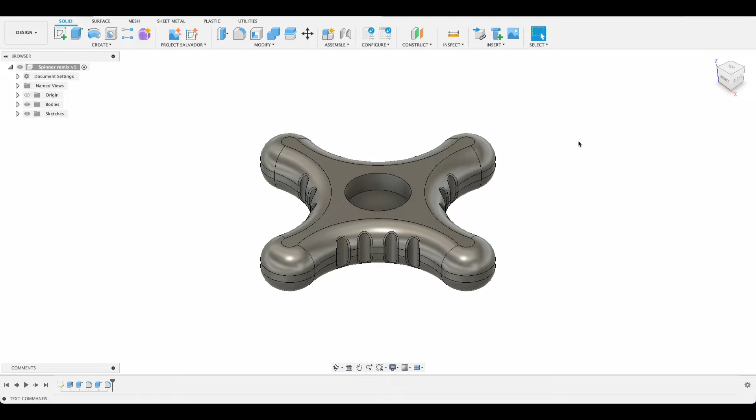Today we're going to be doing this little fidget spinner. So I've got a couple of bearings that we're going to push in there, and we're going to 3D print it. Something new for my channel: I just got a 3D printer, so I want to test it out. So let's get into it.

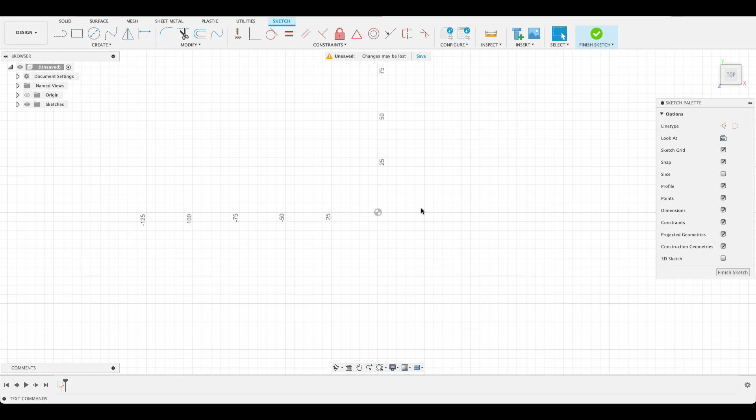We're going to start off with a sketch on the top plane, and I'll push C for center diameter circle, and that will be 16 millimeters. Now I want to have 4 arms around it, and then we're going to extrude it out, putting in a few little features for just some tactile sensation. So let's do some 14 millimeter circles around the side.

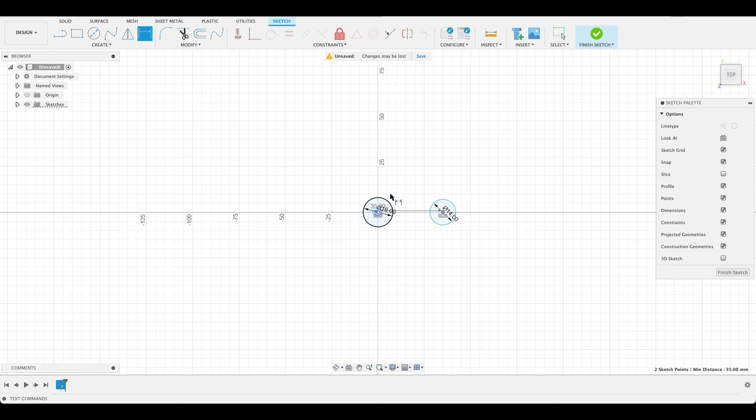I'm just going to put a horizontal constraint on that. So I just went up there, horizontal, vertical, clicked on the center, and clicked on the center at the origin there. I'm going to dimension this 30 millimeters from the center, and then we are going to circular pattern our circle. The center point will be our origin, and there's 4 of them. So you can see it's all fully constrained, which is good.

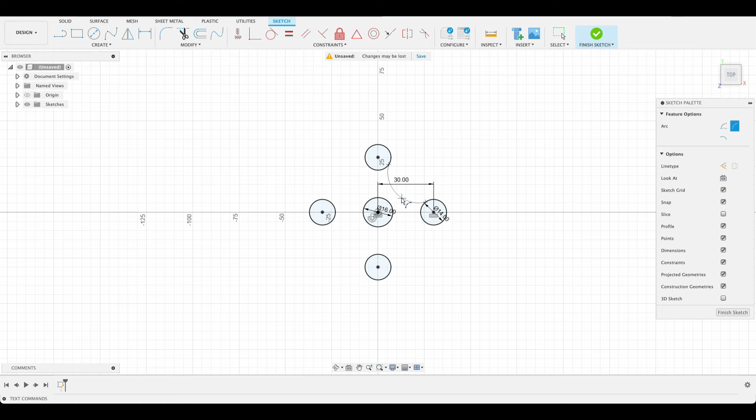Now I want this to kind of curve inward a little bit, so I'm going to create a 3-point arc, and I'll just click over there on the 2 circles and drag it out, and we can take our tangent constraint. So if I put that on there, the arc will adjust so that it runs tangential to the circle. Just gonna move that out a little bit. I don't want it to go too far in. And D for dimension, and I'll just make that 17, and we can see that's constrained.

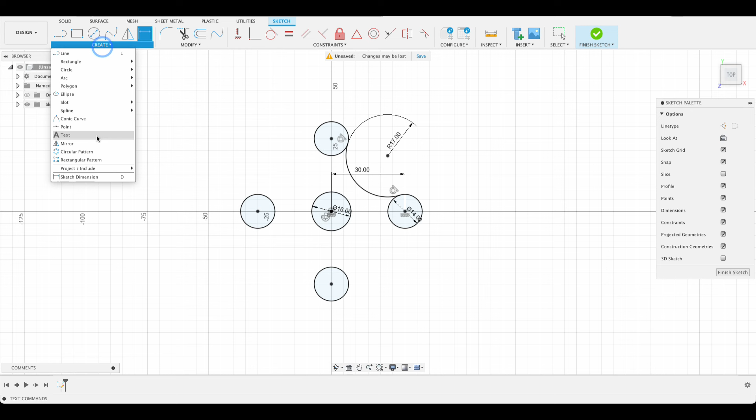Now we'll repeat the circular pattern. The center point, I don't know why I changed the center without selecting. Anyway, we've got our center point and we've got our line, and the quantity is 4. So that's what we're going to extrude up. I'm going to finish this. We'll do another sketch just now, but I want to just extrude this one up.

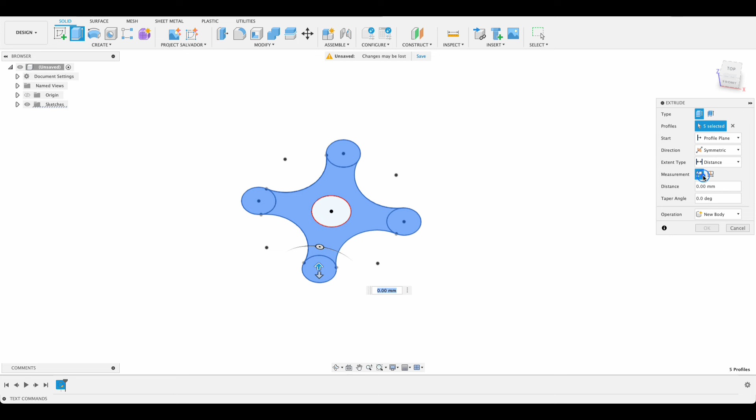So the bearings are 5 millimeters in thickness, and I want this to have like a 2 millimeter gap in between them. So I'm going to do it symmetric around the origin, 6 millimeters, so then there should be 2 millimeters between the bearings, little gap, and then they'll be flush with the top. And I did it symmetric.

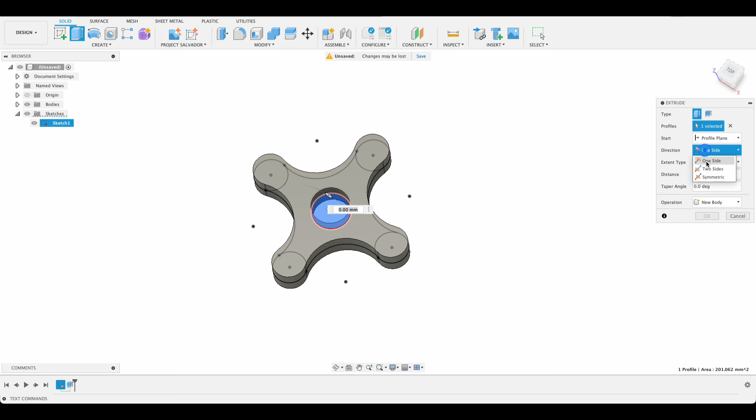You'll see why now. That little center bit is also going to be symmetric, distance 1 millimeter. So now that's joined. If I go into Inspect here and go to Section Analysis, select one of these planes, we can see that we've got that little 2 millimeter section, so the bearings should slot in the top and the bottom and be separated there.

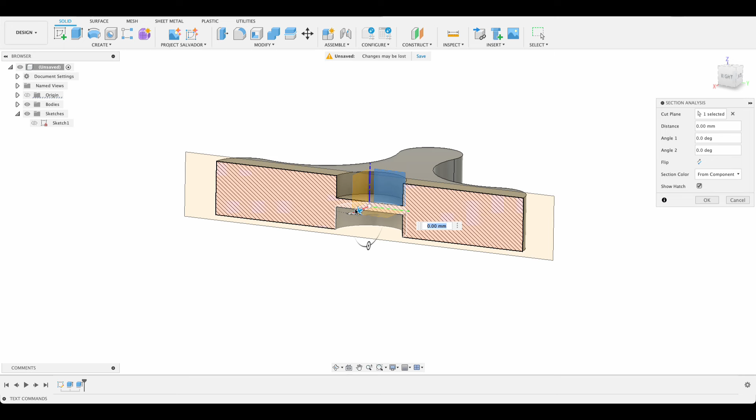So there we go. I'm going to put a fillet around these edges, the entire way around the top and the bottom. Not sure how much. 5. Now it's getting a bit much, so yeah, let's go with 6. Just hope the curved areas don't affect the print. I don't really know much about 3D printing yet.

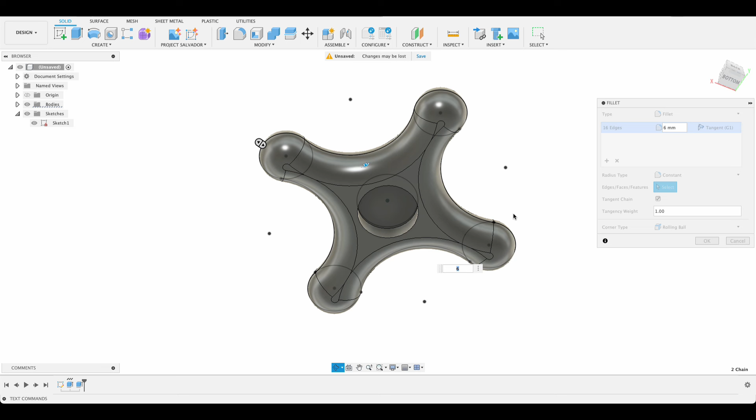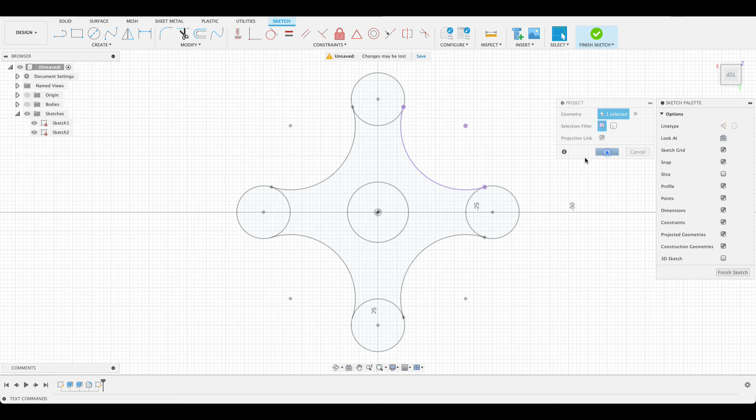So okay, next we're going to create another sketch also on the top plane. Let me just turn this body off so that I can access the top plane. We could have done this with the original sketch, but I wanted to do it this way around. Just going to P, project this line, and C for center diameter circle.

So when I tried this earlier, I tried to do it with a pattern tool after I'd extruded, and it didn't work so well. So I just decided to do it manually. It's just as easy, I guess. So what I've done is just created a center diameter circle there, and given it a distance between our origin and the curve of 20 millimeters, and then I'll do 2 more

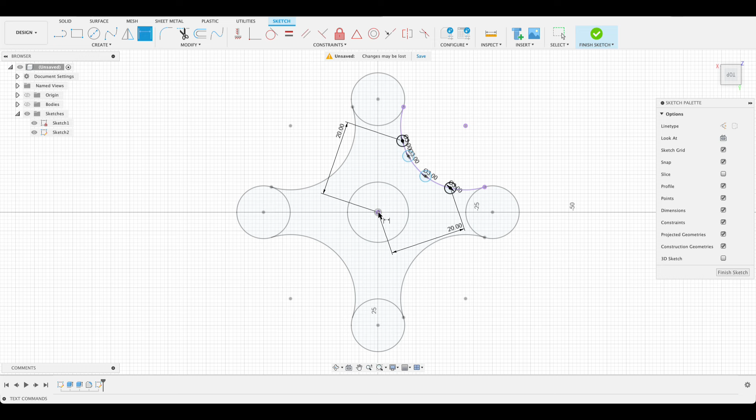here. This is just something so that it's like ribbed on the side, so you can, I don't know, play with it, I guess. Got a bit of a tactile, fidgety vibe to it. And then what I'll do is dimension these from each other. So it will be symmetric to a degree. Obviously the center line, these won't be the same. Let's see, it's close-ish, but I'm not going for perfection here. It's just a quick little design that we can 3D print.

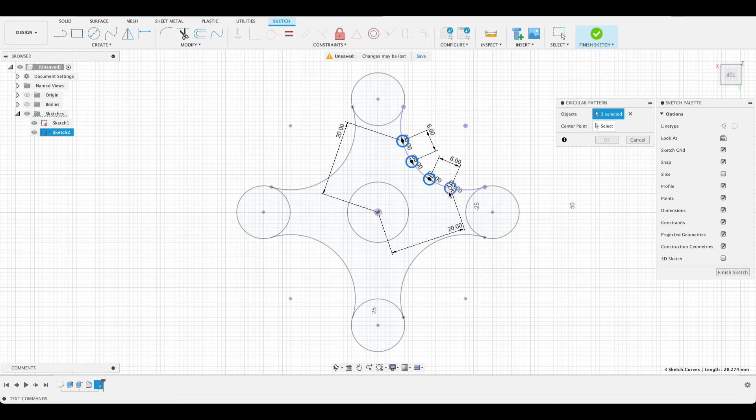We'll go into circular pattern, and we will select our circles and pattern them quantity 4. It looks like I selected, let me just reselect those there. I was selecting, okay, let's try that again. Select the entities, then select the center point, and 4. So that's what I'm going for. I don't know what was happening earlier.

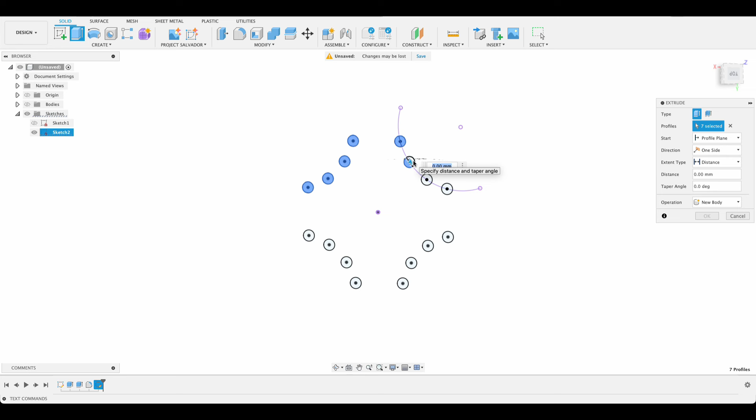Finish sketch. I'll turn bodies on, so we're going to have extrudes coming right through there. So I'll select all of these, turn the sketch off. We'll select all of our profiles. We don't really need to select the ones that are outside of our arc there, but just make sure the whole profile is selected. We can turn our bodies back on. It's going to be symmetric. We just drag it out, and it's going to cut into it over there. So there we've got these little ribbed edges.

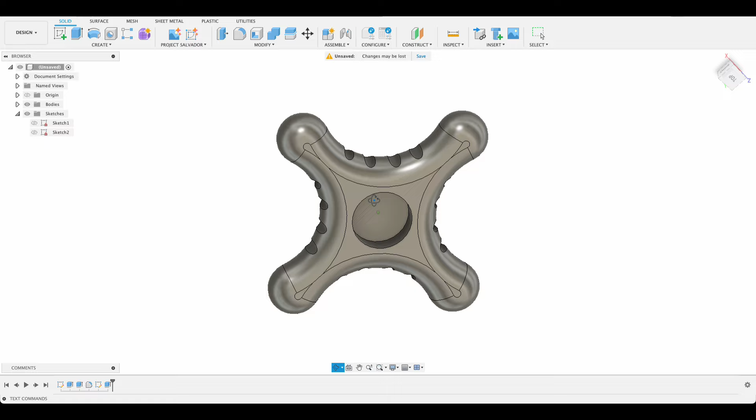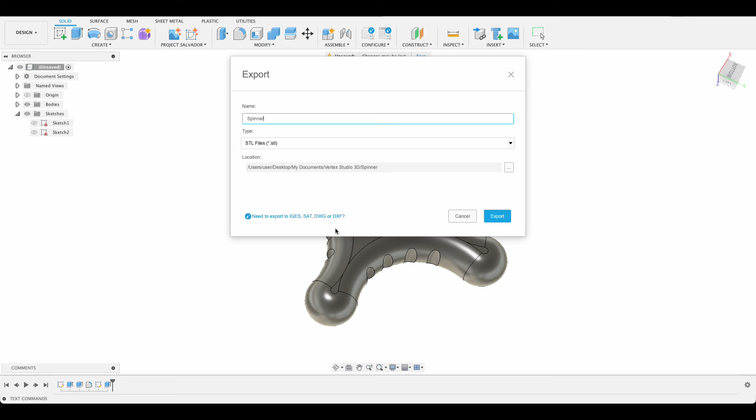So what we're going to do now is get to 3D printing it. So that is our design finished. Now I'm going to go up here and click File, Export, and we're going to export STL, and I'll just call it spinner. There we go, exported it.

So now we're going to the slicer. So we're in the Cura Ultimaker slicer here. Just going to drag and drop my part there, and we're going to slice it. I've just selected super quality there. That's the standard one. Let me just default it because I've been playing with these. Wall thickness is 1.2 mils.

And one thing I do want to put in is, just don't know where it is now, is this enable ironing, because it seems my surfaces aren't very smooth. And then I'll do these 2 as well. I think that makes it smoother. If it doesn't, please do let me know. And then triangles, because apparently triangles are the strongest, and I believe that. So now I'll slice it.

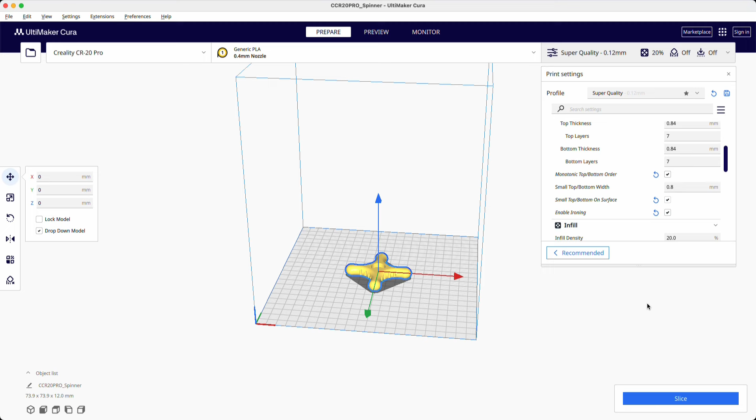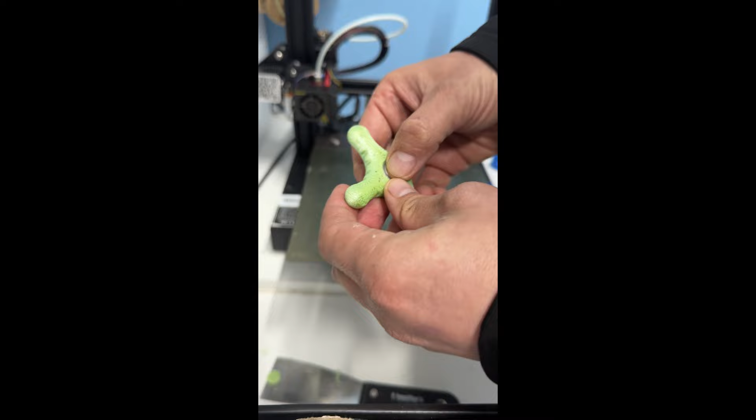So there's the finished part. Not the best print. Let's see if my bearings go in. So there we can see the difference between what I have created versus what I've printed. I think my 3D printing skills need a lot of work, but at least there's something from conception to reality.